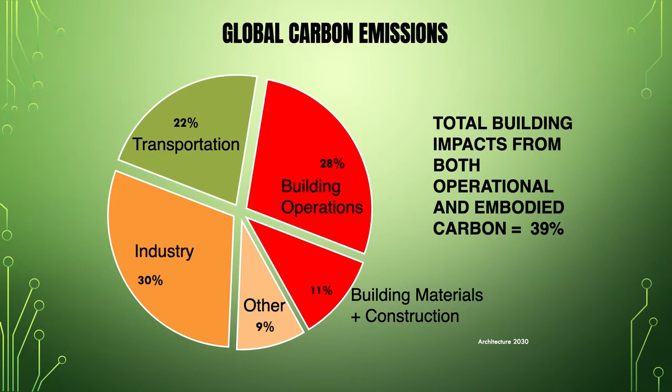Furthermore, if we look at global carbon emissions, that's from the entire world, we see in this pie chart from Architecture 2030 that the building operations, or what we call operational carbon, represents 28% of global carbon emissions, and building materials and construction, which we call embodied carbon, is 11%, together making 39%. A lot of the global carbon emissions comes from buildings, but it's actually worse than that.

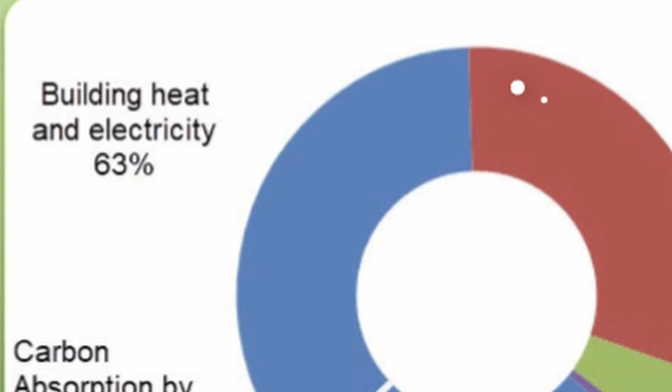If we look at a typical North American city of, say, 1 million people, we have actual carbon emissions from buildings that derive 63% of the total carbon emissions in that city. So the bigger the city, the higher the percentage of carbon emissions come from buildings. New York City, for example, is 70%.

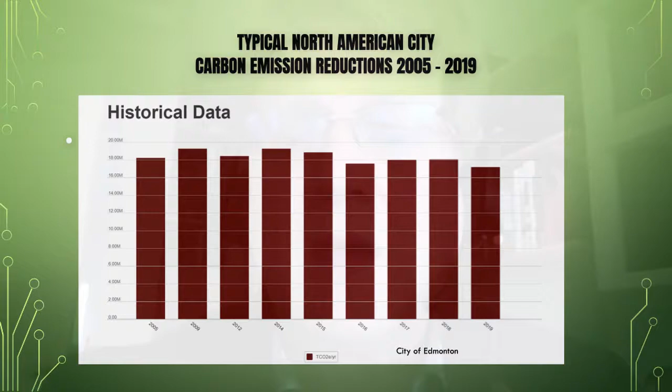So in typical cities across the continent, we know we've got a lot of carbon from buildings, and we also know this. If we look historically at the data of cities and their emissions from 2005 to 2019, this one typical city really doesn't make any gains in those 14 years. 2005 is a pretty good marker to start because it's when there was sort of mainstream awareness that we had to make some changes and municipal policy started coming in.

And there has been some headway because we've made more and more carbon by building more and more, and we've managed to keep it roughly the same. But in 10 years, we need to halve this. We need to cut it down in half. So we need massive change, and we need it now.

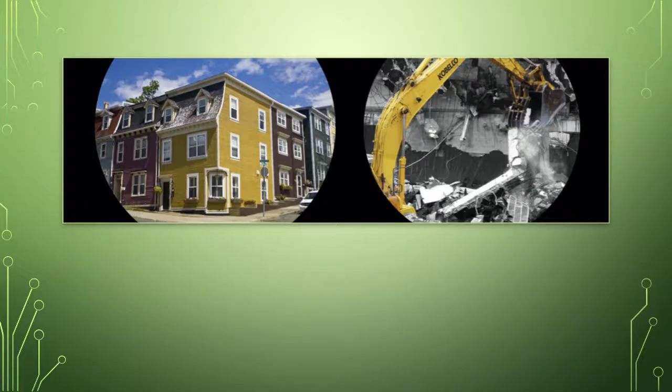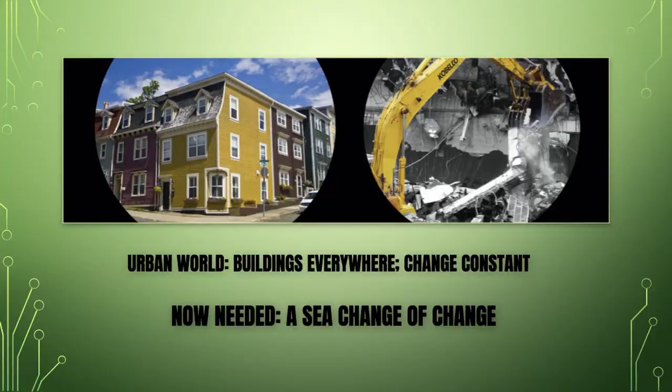And if we look at the world, we know that 80% of people live in urbanized settings. So the urban world is a place where there are buildings everywhere and change is constant. So the fact that cities change is not a problem. Cities are organic, they're going to grow, they're going to evolve, they're going to adapt, and that's good. But what we want to do is change what we're changing. So we need a sea change of change. And it's that type of change that I'd like to talk to you a little bit more about.

Instead of demolishing every building as soon as it doesn't feel like it has value anymore, when it actually does, and building new, why don't we reuse those buildings and save a lot of embodied carbon? So let's recap for a second. The stakes are really high. Decarbonization is urgent. The impacts on human, financial, natural, and cultural assets are massive. We've got about a decade only. Existing buildings are about 1/3 to 2/3 of greenhouse gas emissions.

Really, from my perspective, there's only one good solution in combating climate change, and that is the extreme acceleration of green rehab of existing and historic buildings. And in fact, looked at from another way, the Intergovernmental Panel on Climate Change, who's really the world authority on this topic, have told us that improving energy efficiency in existing buildings encompasses the most diverse, largest, and most cost-effective mitigation opportunities to combat climate change.

Great, but they told us that in 2012. So what have we done since? Well, not a lot, and it puts a lot of pressure on moving quickly to really have a paradigm shift in the industries that deal with buildings in any way. In fact, so much so that I think we need to apply a new principle.

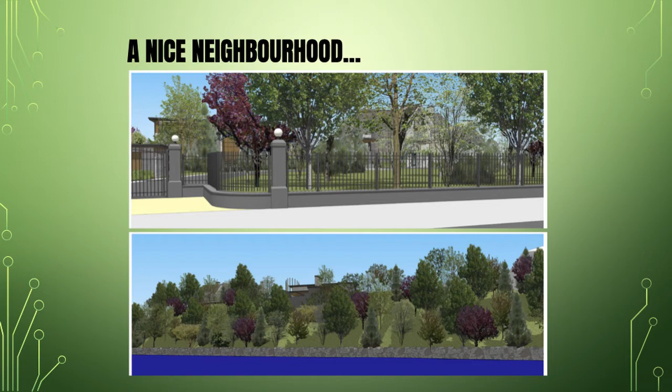Not only that, but this particular building is in a nice neighborhood. These are modeled images of the view to the home from the street on the top image, and a view to the home from the river, because the property that the house sits on actually backs onto the river. So we have a really lovely setup here.

So if we have all that, why are people recently raising a hue and cry for demolishing the building? Okay, yes, it hasn't had its proper maintenance upkeep for the last couple of decades. It does have leaky windows and out-of-date systems. And yes, people are saying we can do better with a new building, but really there's a lot of value in there.

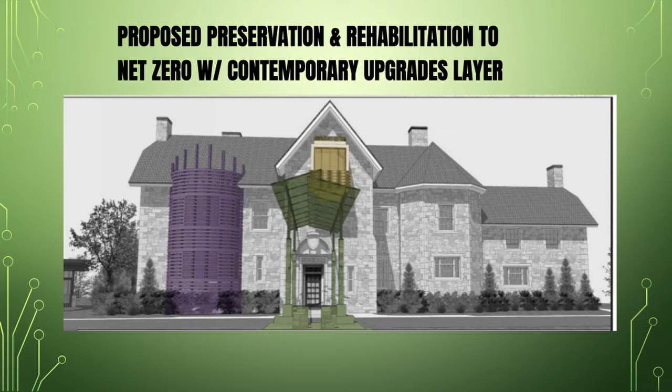And to keep our carbon down, what we proposed is preservation and rehabilitation to net zero and adding the contemporary upgrades layer. So another change to the house, just like it's had in its evolution, a new layer of contemporary needs of the day. And of course, in this case, there's the 3 features that we saw in the early days of the house, but expressed in a new way again. And rehabbing to net zero, so we're saving all of that embodied energy.

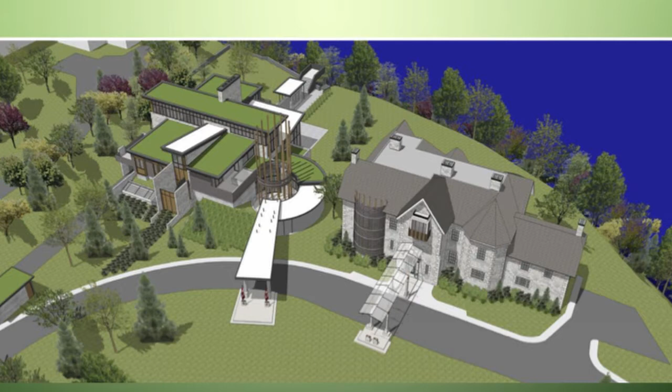What are we doing with all the mounting pressures of the new needs and the new requirements of the home? Well, we've been able to take those out and put them in an addition so that the historic home itself can really serve the function that it was originally intended to do. It's a single family home. And all of the new additional pressures, or shall we say programmatic elements that need to be accomplished in the house, can still be accomplished with a very compatible secondary building on the site.

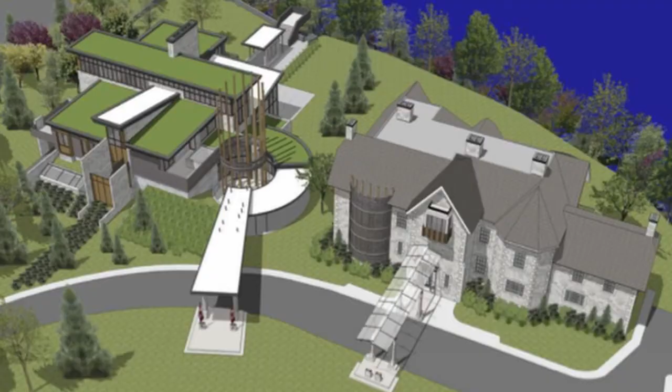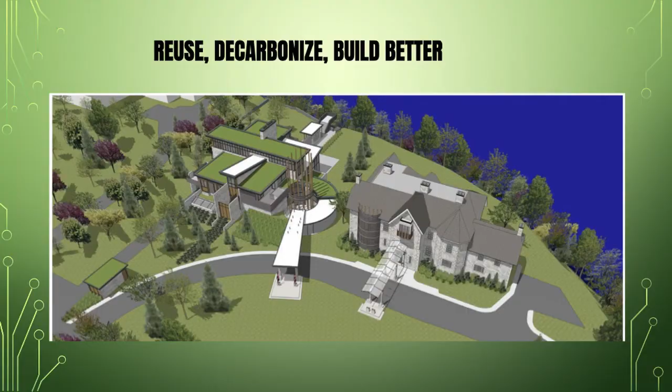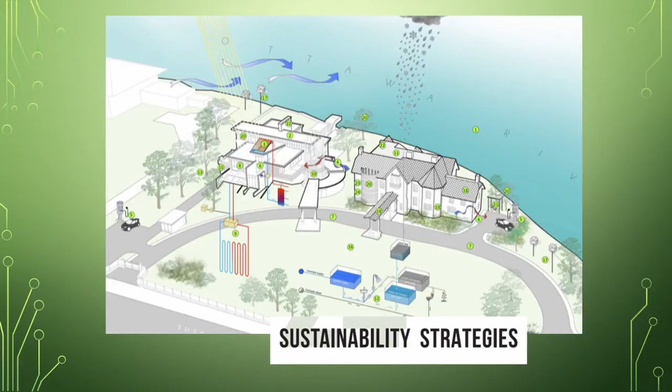But really, the solution, instead of just demolishing the building, we want to reuse it, decarbonize it, and build better for today. And in order to do that for 24 Sussex Drive, this proposal takes 24 conservation strategies for the preservation and update rehabilitation of the historic building, and the upgrade to net zero for that building is part of 24 sustainability strategies for the whole site.

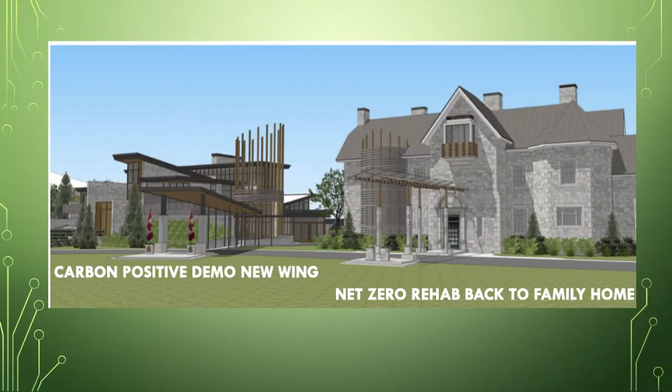In this case, the new building, the existing building, and the site itself all contribute different factors to bring us a high level of sustainability. In fact, the new building being carbon positive, where in effect it's like adding back into the carbon grid instead of the energy grid. And it can become a demonstration, a new wing that demonstrates Canadian prowess, Canadian technologies, et cetera, for green, sustainable growth. And the existing building, now rehabbed back to a family home, but at net zero carbon.

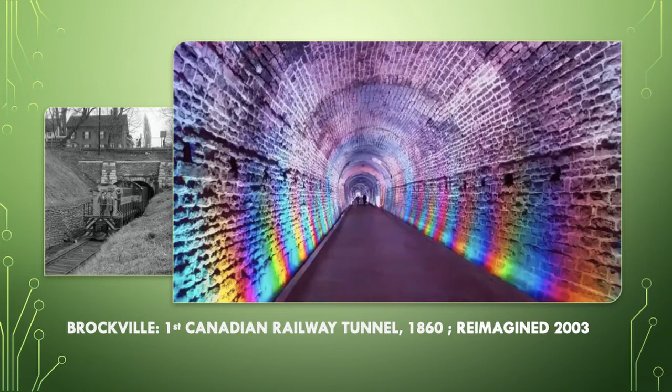People love the juxtaposition of new and old. They love it when older things, older buildings especially, are brought back to life and new uses, new elements are brought to the fore. For example, Canada's first railway tunnel in Brockville, built in 1860, shuttered for decades, becoming just a liability, now has been transformed back into an asset, something that people love to visit, with a new soundtrack and kinetic lighting system. It's really a wonder to walk through.

The bottom line is we need to find a way to disrupt the design and building sectors, the construction industry, real estate, all the industries involving existing buildings, and have them embark on new collaborative change that addresses the decarbonization of most existing buildings, puts a new focus, if you will, in the industry. And really, if we can do this with the Empire State Building, which is a very complex building, almost 100 years old, a very challenging deep carbon retrofit and rehabilitation that has been very successful, then we can do it really on any building.